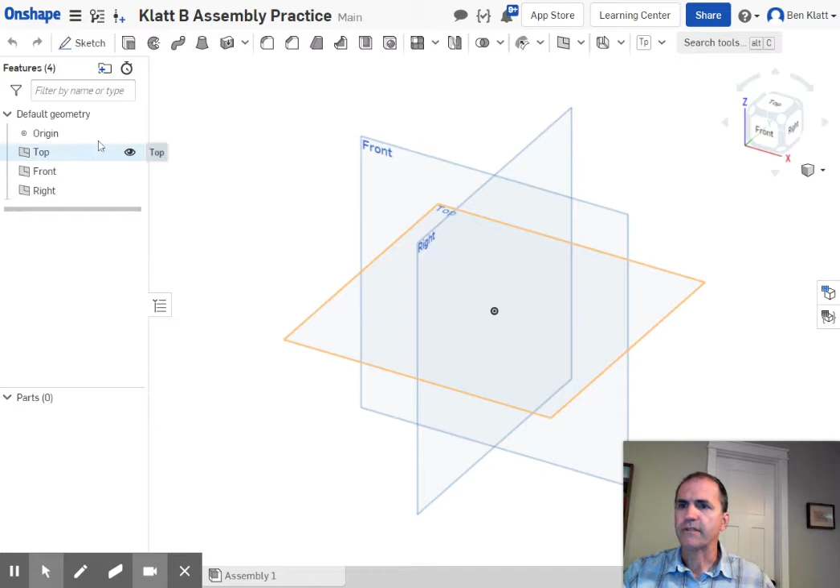So let's go ahead and sketch. Doesn't matter what plane, and view normal as always.

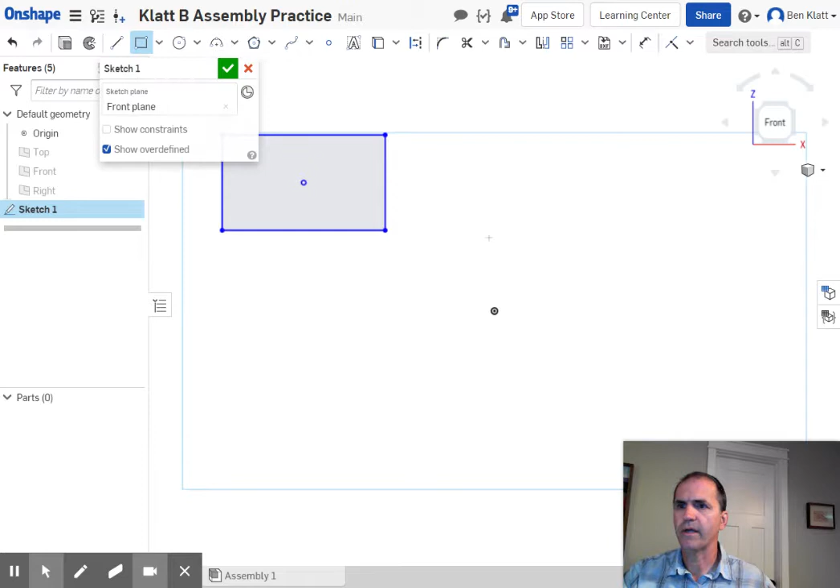Let's just start by making a bunch of shapes. I'm going to make a rectangle, and then make a slightly smaller rectangle. Now I happen to be using center point, but I'll show how to do this with corner rectangle. Let's also make a long, kind of skinny one. Then let's make one kind of like your first, but a little bit smaller. Something like that would work out.

And then we're going to make some circles and just place some circles. It needs to be a little smaller than what will fit into here. So we lock it under the center here. Now to put it right in the middle, remember you've got those little yellow squares that will show up, telling us we're holding it to the midpoint.

And that-ish. Now let's make these two circles equal in size to each other. Equal. I know everything's blue because we haven't defined anything where it is. The only thing we've got is equal size circles. Okay, that'll work.

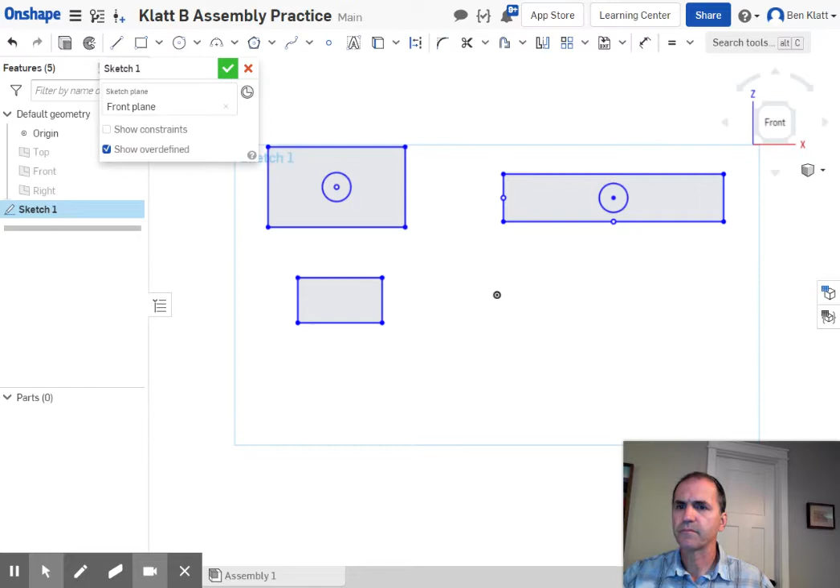So go ahead and finish your sketch and extrude. Now here's what I'd like you to extrude. We're going to extrude around this to leave a hole in it. This one, no, I take it back.

We'll just extrude all of them just like this around the hole. And then we're going to—oh, I didn't hit extrude first, I just hit the profiles. That's okay. Now make it look about like this. We didn't define the size, so just adjust it so it's like that. Maybe I'll make it 0.5, something that looks approximately like that. Doesn't have to be perfect.

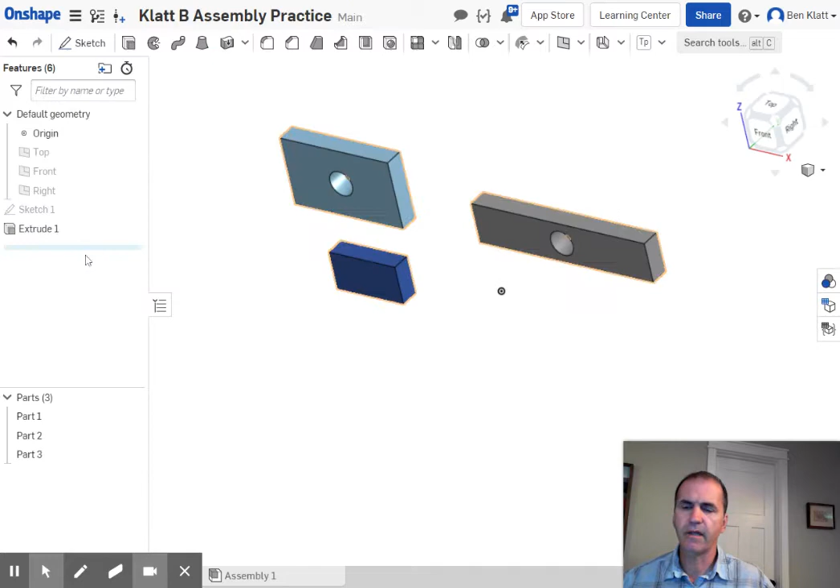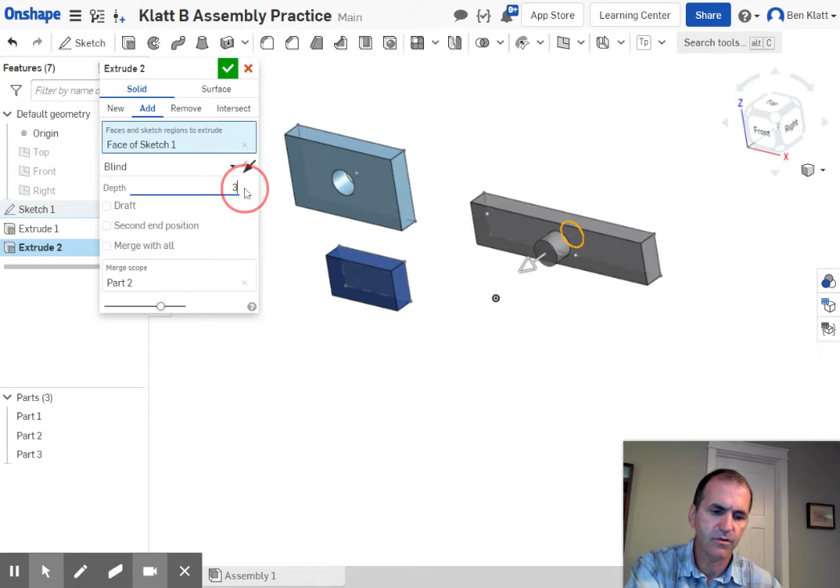Now one of these things is going to have a hole in it. The other one is going to have a shaft sticking out. So I need to go back to this sketch and turn it on, and I'm going to extrude just that guy and make it stick out a ways. I don't know, let's try 3. See how that goes. Yeah, that'll work.

Okay, so you have kind of a helicopter looking thing, okay? Now what should have happened when you did this is we should end up with 3 parts, because the first extrude that you did recognized that they were not touching each other and made them all new. If it said add, then just change that to new to make sure that there are 3 parts.

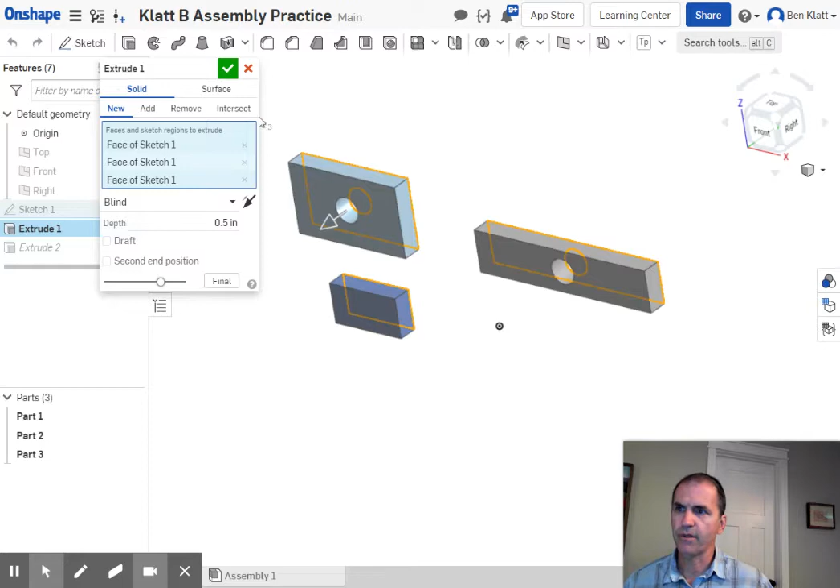All right, so we've got our 3 parts now. Now down at the bottom of your tabs is assemblies. We're going to put these 3 things together in various ways just to explore the different types of joints that there are for putting things together.

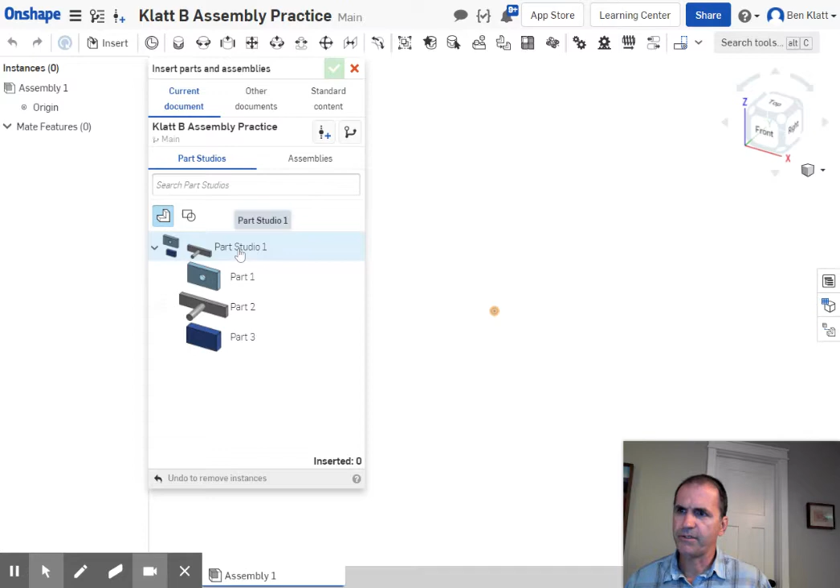So go ahead and click on assembly, and we're going to insert, and we have all these different parts. Okay, so I think I need to do them individually. I've never tried to just put in the Part Studio. Maybe I'll try that. And click—yeah, that works.

Okay, so it gives them all separate, puts them all in. Okay, that works. Whoops, that's not what I meant to do. I should have hit the check mark. Okay, so just because I don't want to see it, I'm going to turn the origin off.

All right, so let's talk about all this different stuff that we've got in an assembly. Up here along your toolbar are all these different mates or constraints—joints, if you want to call them that. So it's ways of holding things together. If you hover over something long enough, it will tell you how to do it. So I'm going to show you what these things mean.

Let's start off by putting this part and this part together. Now one of the things that is going to happen is you can move everything around in space by holding down on your mouse button and moving it. It is always a good idea to take one of your parts and fix it in space so that everything relates to that. Otherwise things get wonky and move around and it gets weird.

So go to one part and we're going to fix it. Notice it will show up here in your browser that one of your parts is fixed, or more, and it's that one that's fixed in space. Now you can't fix all of them, because then if you try and put them together you've made an impossible situation—you can't take two things that are fixed in space and now say I want to put them together. You're trying to create two things at once.

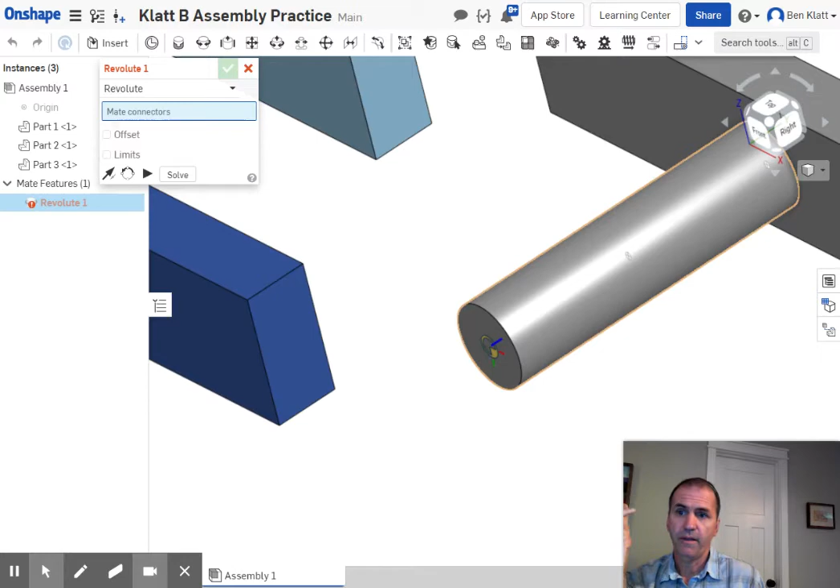What happens is the blue, green, and red are showing your axes. Blue stands for Z, green is Y, and red is X. Now, these don't necessarily show up in the same way as your view cube does, but it will relate to another one. So if I say I want that right in the center of that guy, it's showing me, and you can hover over it to see which direction the blue is, which is most of the time what we want to line up.

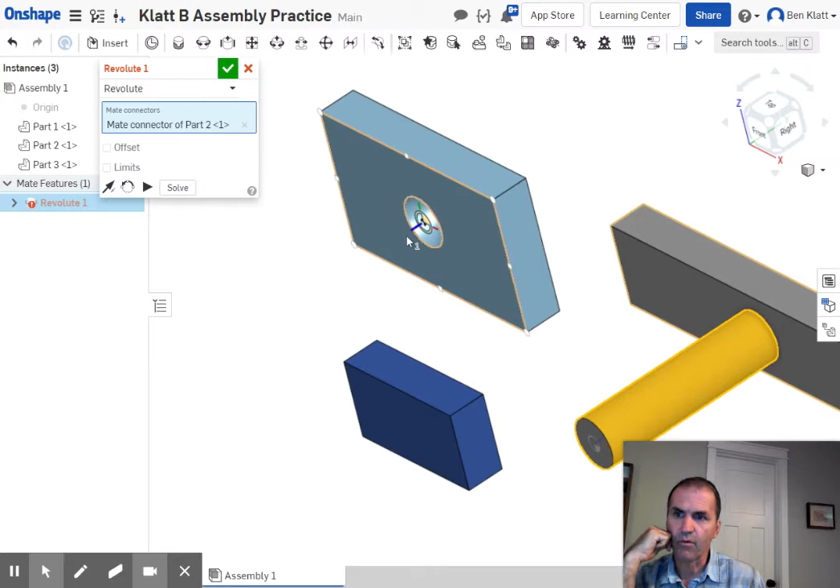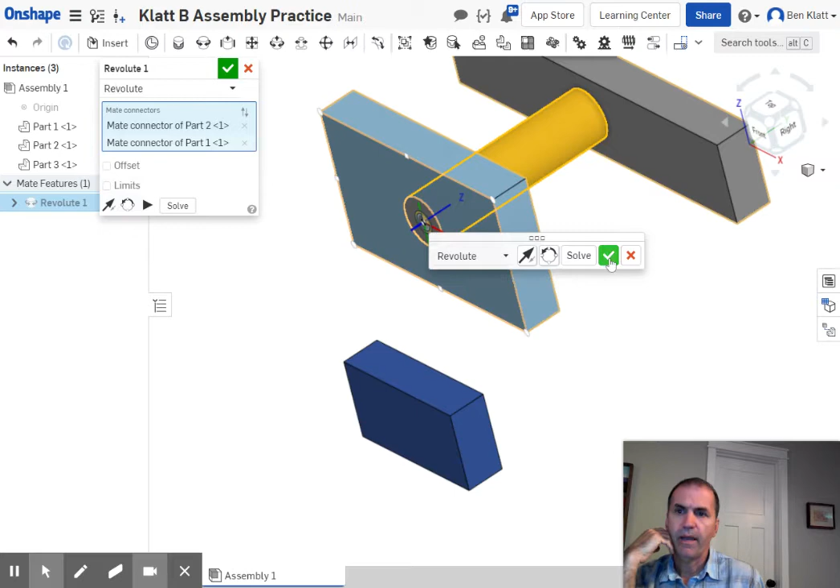Now I notice that it says I've connected those. If I come over here, notice the blue goes in the same direction. So I'm right in the middle of this circle, and if I click on that, it now gives me my revolute mate. And if I did it the wrong way, you can flip it to go the other direction. But I did want it to go that way. Now we can say okay, check mark. It leaves this open because it assumes you want to do it again, but once you're done making those mates, you can close that little window.

So remember, this is fixed in space, so now this guy can spin around. And what's hard to see is this cylinder is actually spinning too, but you just can't see it. But it won't move in and out.

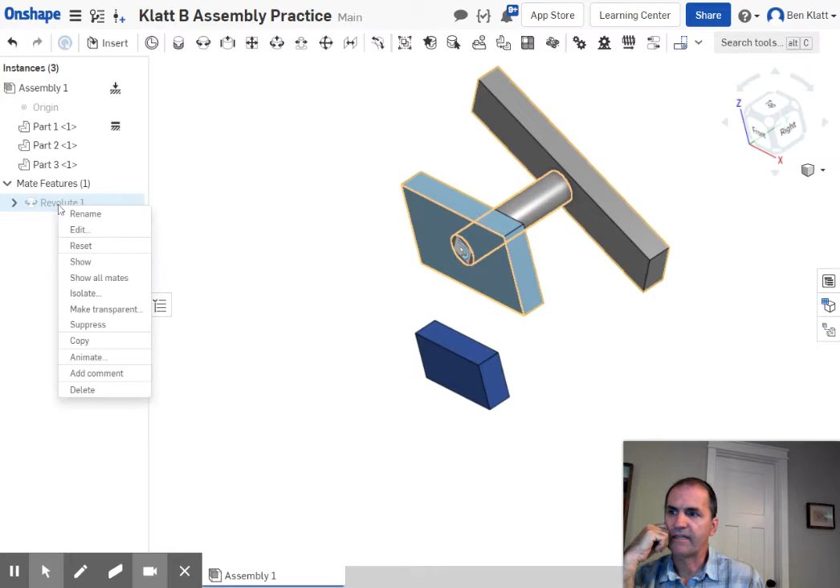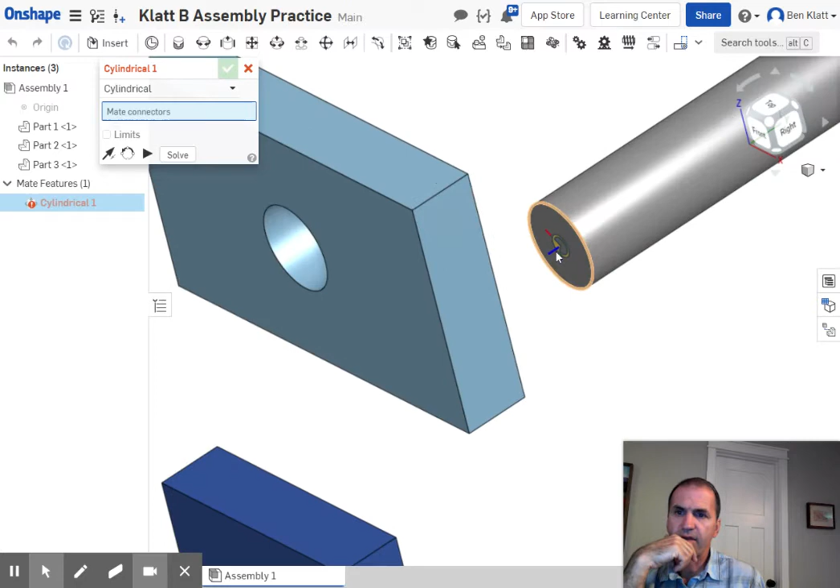Now I'm going to go over here, delete that, because we're going to show some other things. Let's talk about if I want it to be able to spin and move in and out through that hole - then we've got this thing called cylindrical mate. It's really the same thing. We're going to click on that and click over here on the center and line those things up.

Okay, let me get rid of that window for a moment. But this time, not only will it spin, but it will slide back and forth. So that is a cylindrical mate. Remember, the revolute held it in place, whereas cylindrical will allow it to slide and spin.

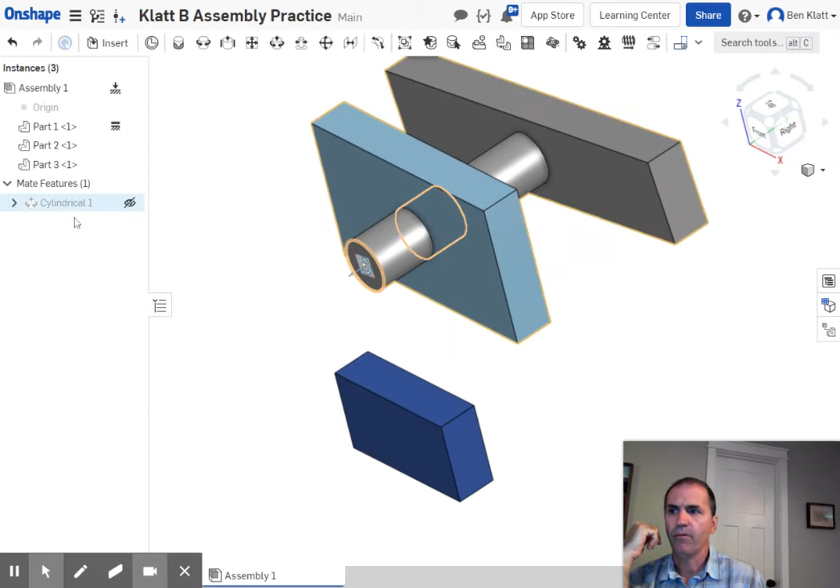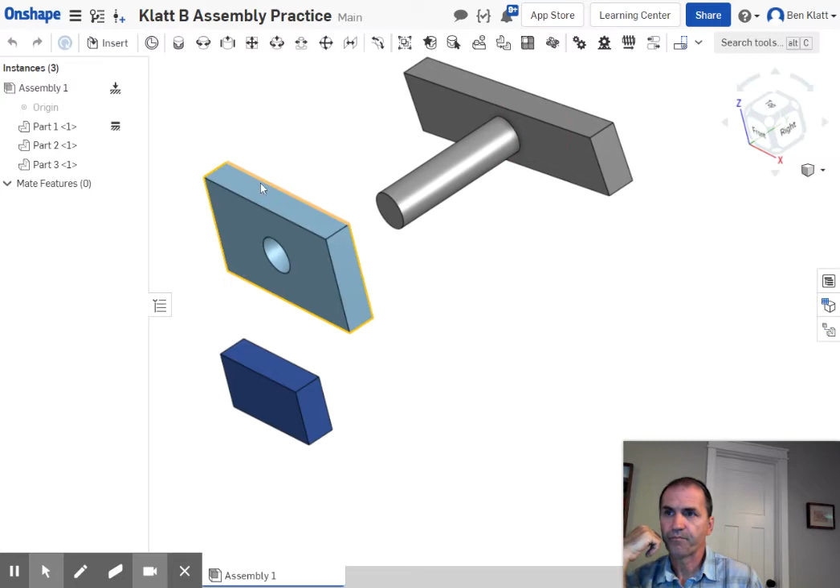Now, let's say I want it to slide, but I don't want it to spin. So delete that - we're going to move this guy out of the way a little bit. And that one is called a slider. Now we got to be careful because it's going to be in whatever orientation this is right now. A slider mate will allow it to slide along that axis, but it won't spin.

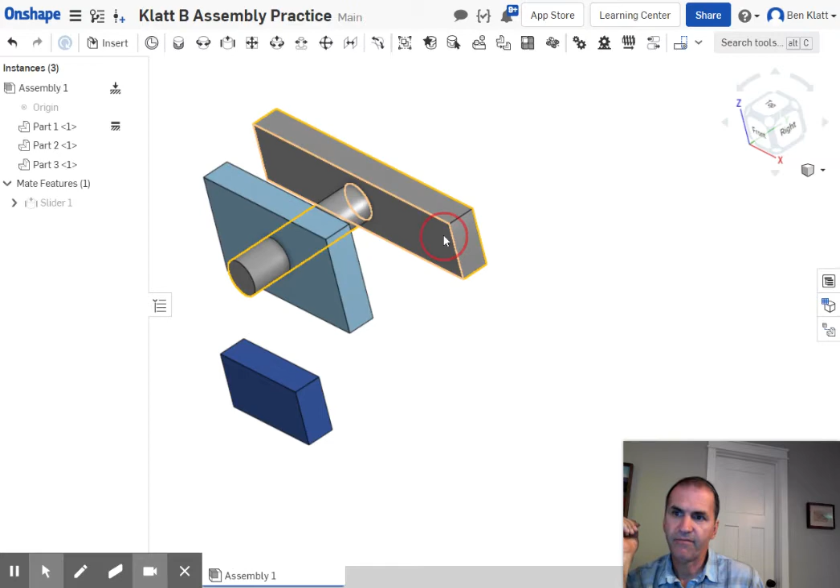So slider means I'm going to say, okay, I want that and that. Get rid of that window. And now it will slide, but if I'm trying to spin it, it won't spin - it just slides. So those are the three things. Let's go ahead and leave that slider mate in here.

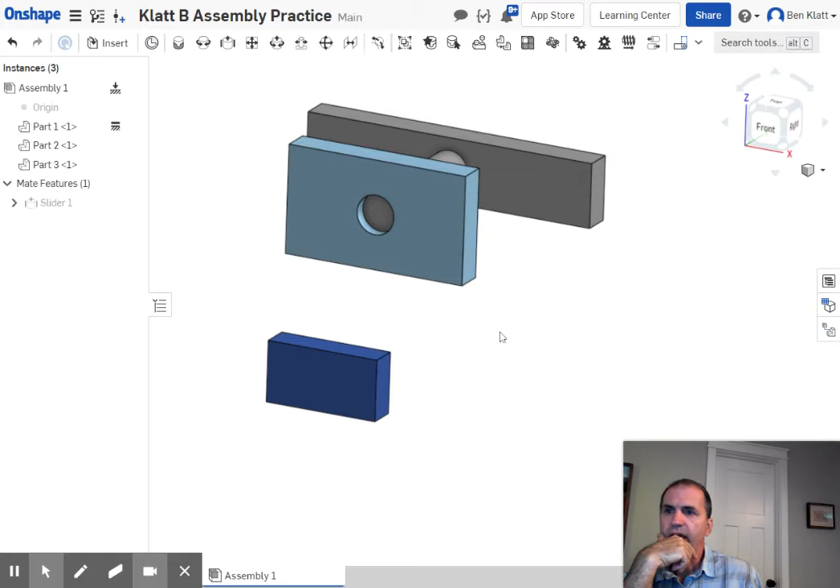Now, let's say for whatever reason, I want to put this block onto here and I want to center it in the middle. Difficult thing to do. There's a couple things that we can do here. One is called a planar mate. A planar mate takes any two planes and it puts them on the same plane. They can move around, but the planes are joined together.

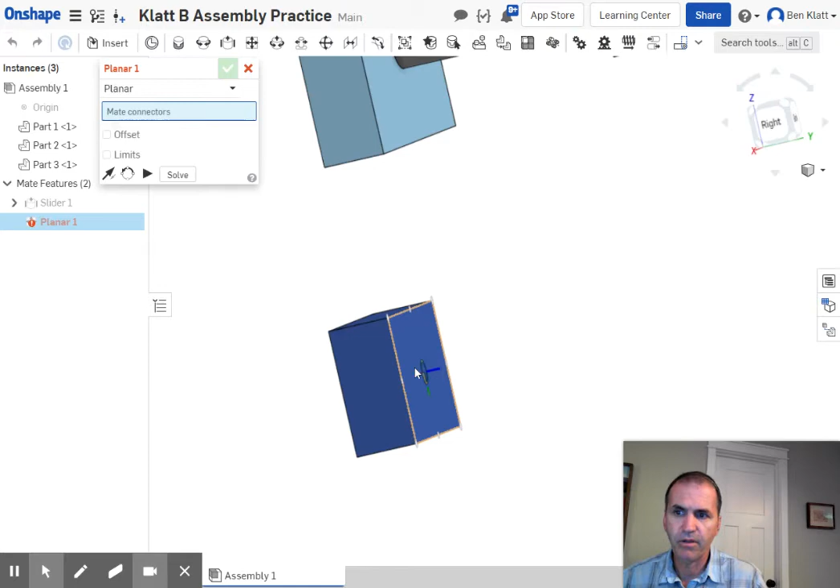So one of the things we could do is say I would like to do a planar mate. We're going to take this plane here. Now it shows you the plane. It's also showing you a center point, but that's not going to connect directly. It's just going to take this plane and lock it to another plane. Now it might stick there, but it's not going to stay in that spot.

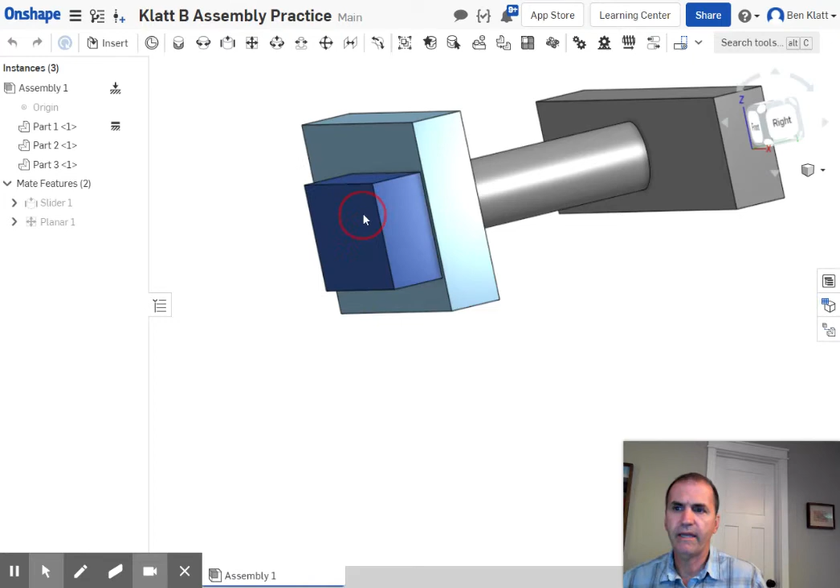Now I can take this part - whoops, I did not mean to do that. Notice it will move around, but it's glued essentially to one plane to another. Now let's say I want to put that right smack in the middle. There's a couple different ways of doing this, and we'll practice that.

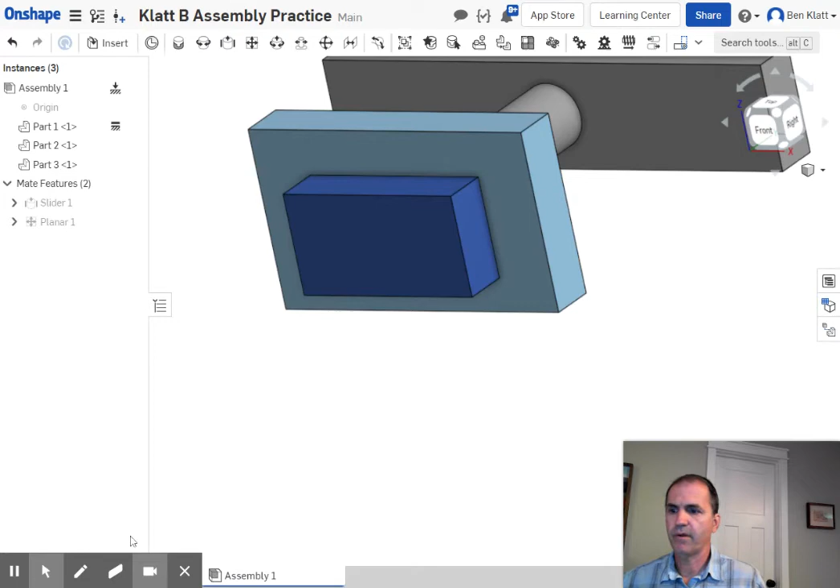One is that we can do a planar command. Now first I need a measurement, so I'm going to have to get rid of my camera for a minute. Measure - I'm going to measure from this side over here to that side over there. And the distance is 0.313. I should have made it to a size, but so I can copy that, I believe.

Whoops, all right, let's try that again. Measure from there to there. I can copy that.

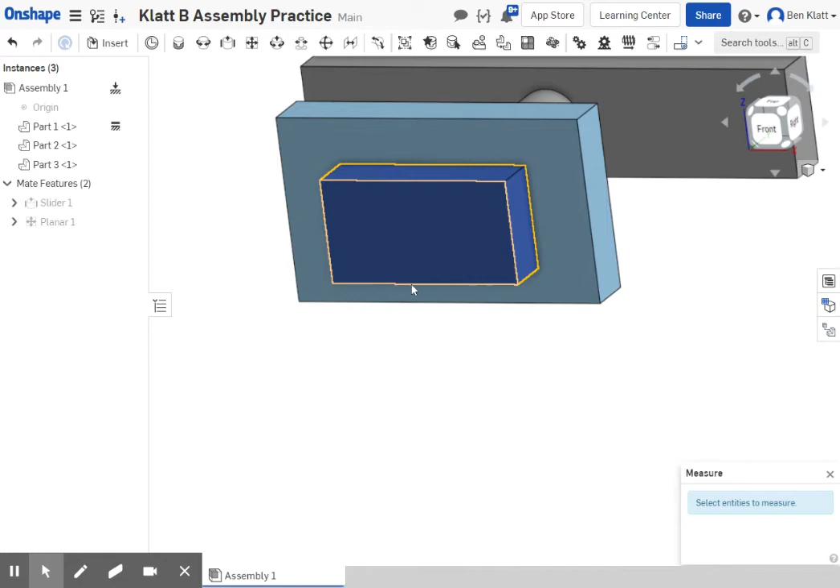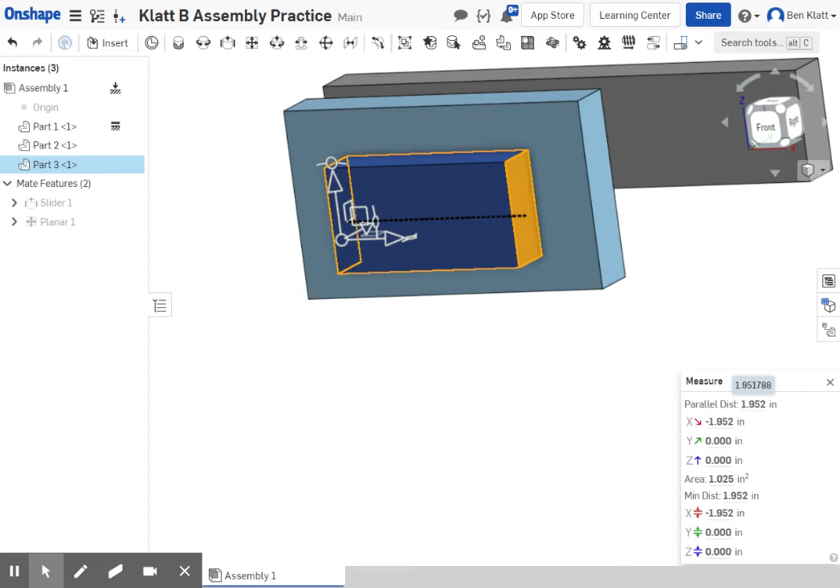Now I'm going to show you how to deal with this. I've got that copied, so I want this distance from here to here to be whatever that is minus whatever this space is, which is the whole thing divided by 2. So I need to get that other measurement also. We're going to measure from here to here, which is 1.952. Let me write these down: 1.951788. This is why you've got to make things the right size, but we're just practicing right now anyway.

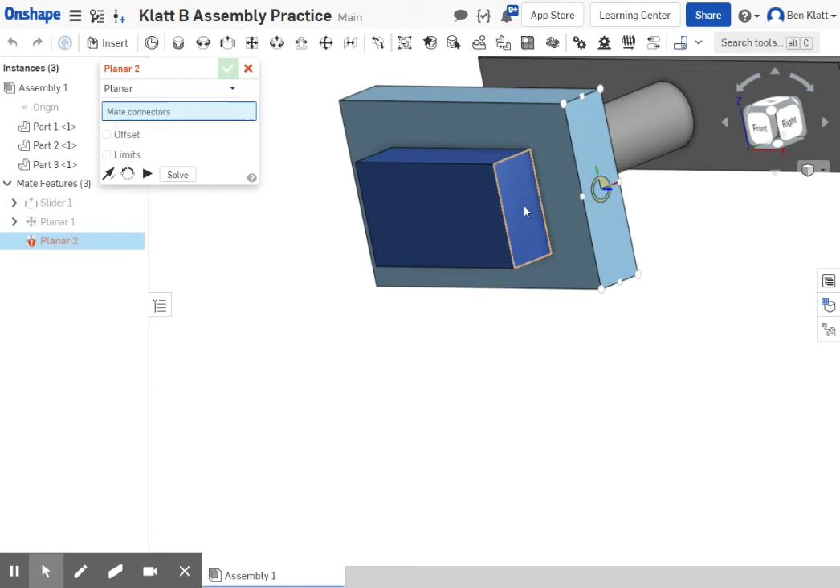So let's say we want to put these together. I'm only going to do it one way, and we'll practice that. Again, a planar mate. I'm going to say I want this plane, and that plane - sometimes you have to hover a little bit to get it to do the right thing. Now it's putting them together, but notice that it flipped it. So I think I can flip my axis or reorient it. Now it should put it back the way it was before because it's ignoring this other planar joint for now, but we can play around with it and see what happens.

Now this time I want to create an offset. I want to create my offset. It's going a Z direction, which is along that blue - that's good, that's the way I want it to go. Right now Z is pointing towards me, so I think I'm going to have to go negative, and it's whatever the first one was, which I still have copied, minus the second one, 1.95. Now your numbers will be different. And that's all in parentheses, and the whole thing is divided by 2.

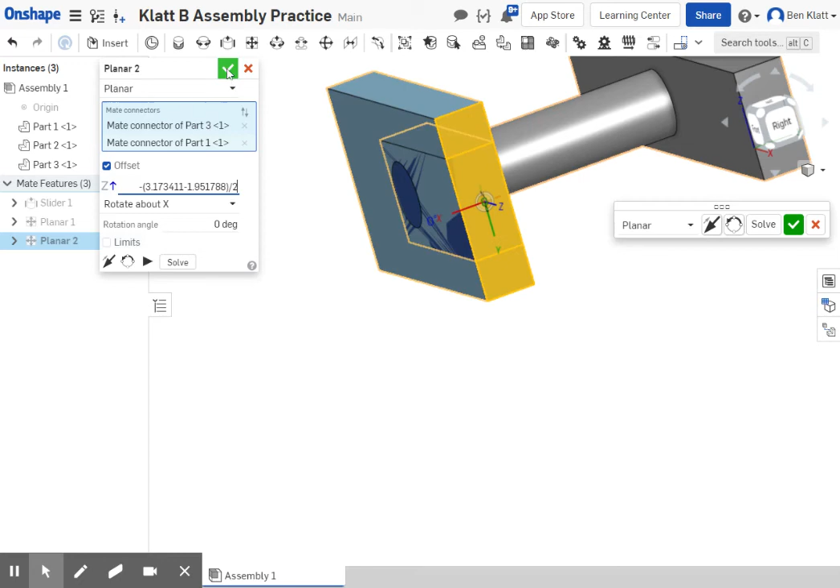Now I hope this works. Okay, so cool, we're right in the center. Now I'm not going to worry about the other one, so notice that this can now move back and forth because I haven't done the other one. So I'm just going to place it right there. All right, so that was planar - boy, it was a rough road getting to that one.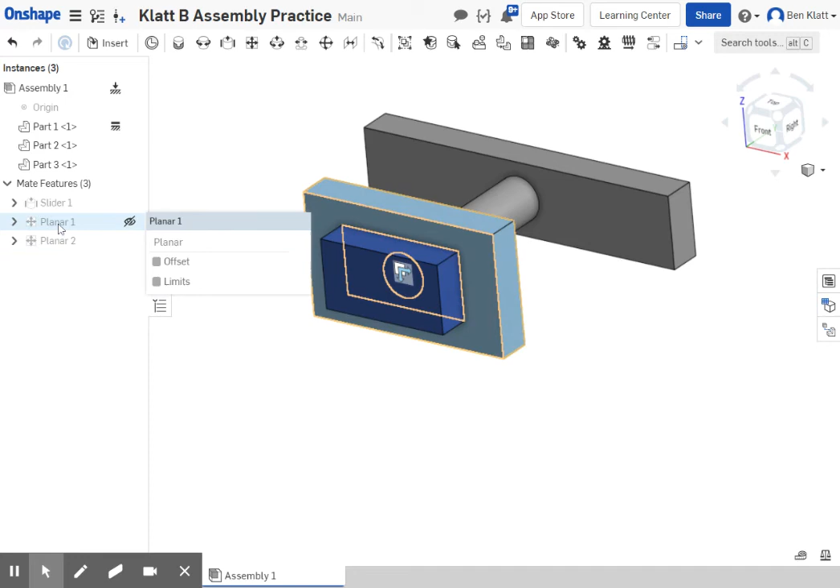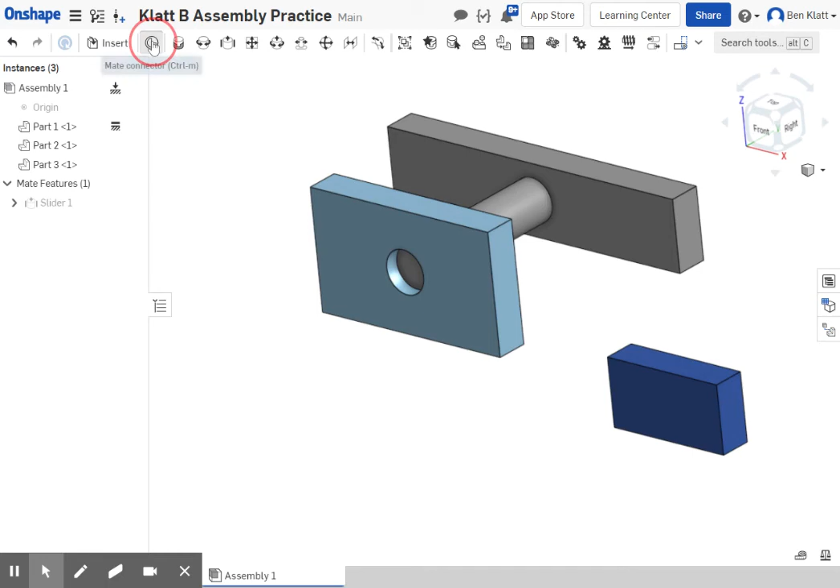Let's talk about another way of doing this, and let's delete both of these planar constraints. Move this guy out of the way. Now there's another thing that we can do - create your own mate connector. So when you mate something, it's finding center points, corners, edges, things like that you might want to reference. But I can also create my own mate connector and put it on an entity, and it's wanting to put it somewhere. Remember how we could hold the shift key down? Right now it's asking me where I want to put that.

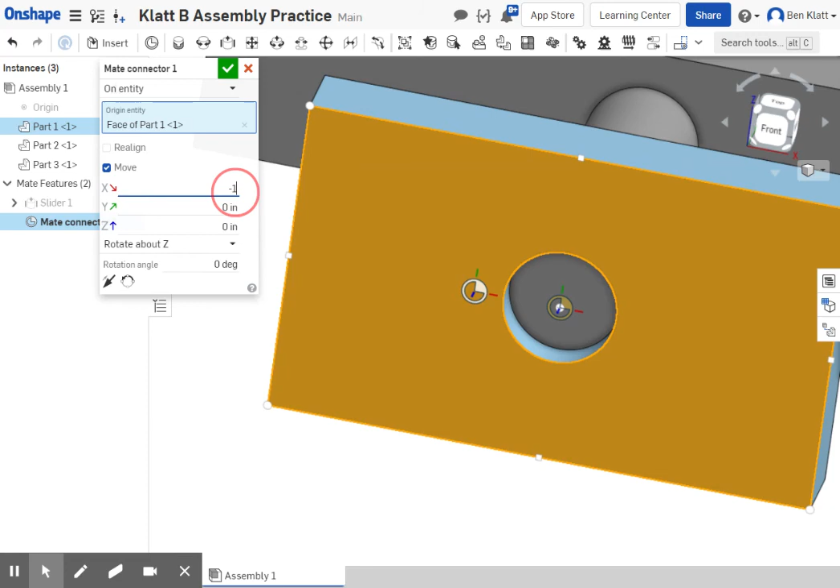Right now I don't want it in those places, but I'm going to click that, and I want to move it. Now I can move it whatever direction I want, and you can use things like - let's go negative, negative 0.5, just for practice. Again, enter will get you a preview. Let's try -1. Again, yours is different, you're just playing around with it. -1, enter will give you a preview. Cool. And I'll go Y direction, which is - notice the green is Y. Let's try going 0.5 up on that. Enter will give you a preview. So let's say that's the right location.

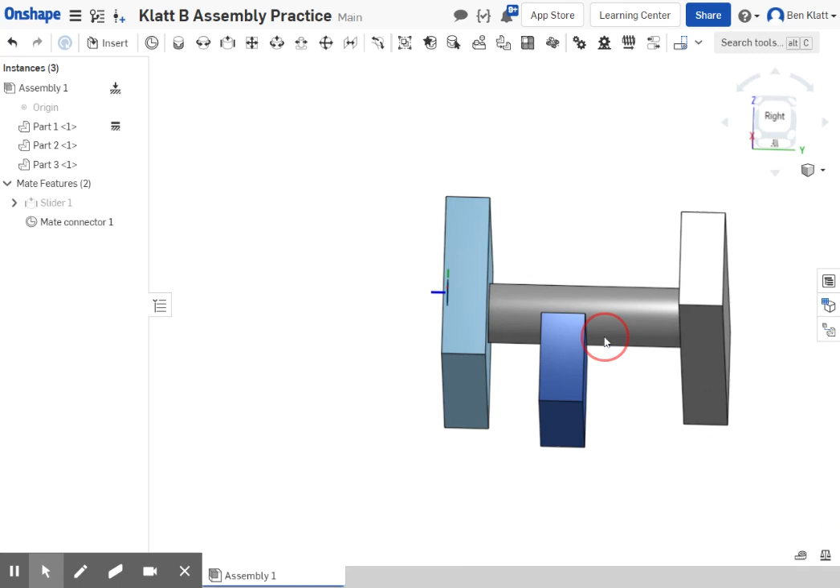Okay, and I've created my own mate connector now. So now we can take this thing and we're going to do our last joint, which is one that you're going to find yourself using a lot, which is fasten. Now what fasten does is it takes one part, joins it to another part, and fixes all degrees of freedom. Degrees of freedom means it can either spin or move, and we're removing all of those and just joining it together rigidly.

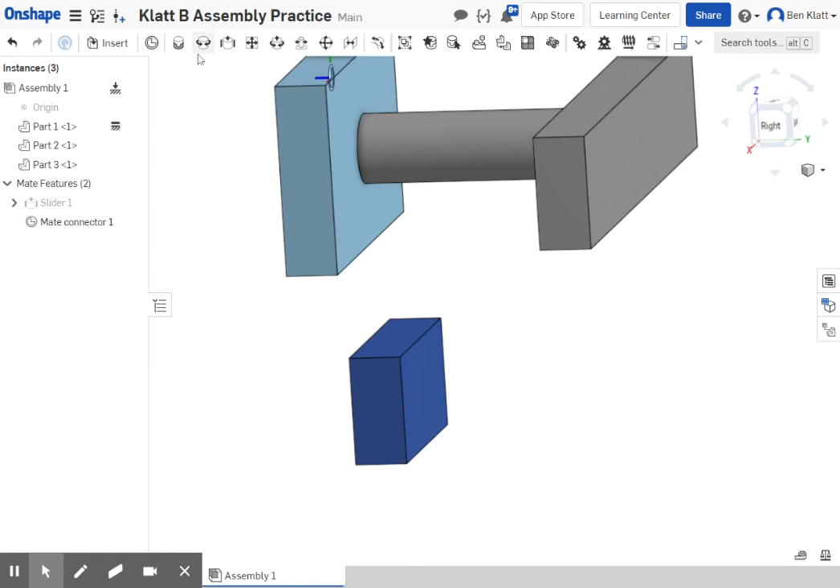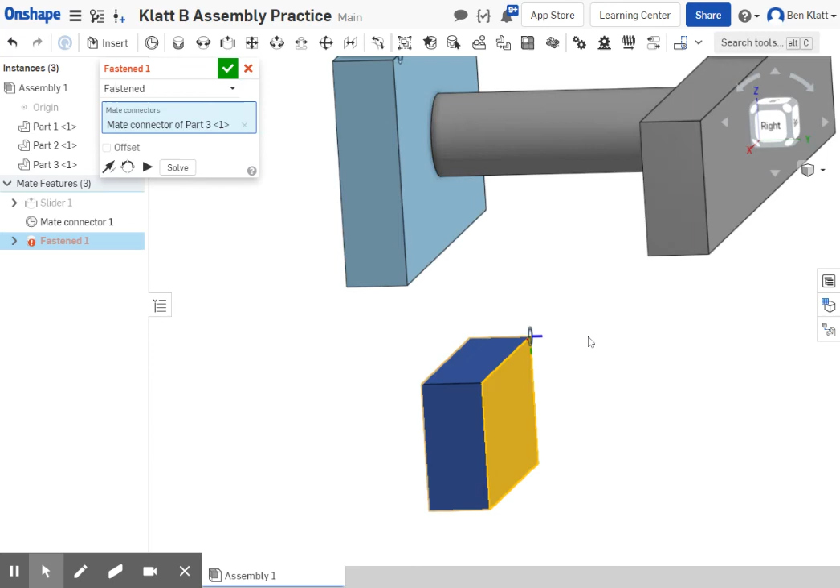Okay, so fasten - I'm going to come up here to this corner now. Notice that this thing is going - it's not going - there we go, that's the way I want it to go. It's hard to see, but right now that's not going perpendicular to this face. Now it is, click on that. And then we will click on the mate connector that I created. And now that part is rigid. I can turn off the visibility of the mate connector if I want.

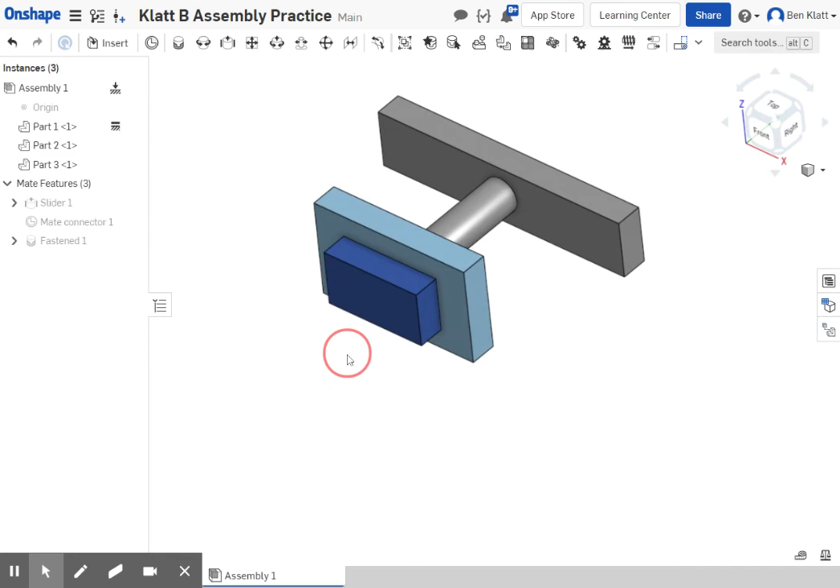All right, so that's the basics of assemblies. You'll be doing this other thing with some other stuff, and then finally putting your own stuff together. So here's the last thing I'd like you to do: right click and hit show all. What that's going to do is show us all of those little constraints that are in there. I'd like you to have those on and take a picture that includes your browser so I can see these mates and your name up there.